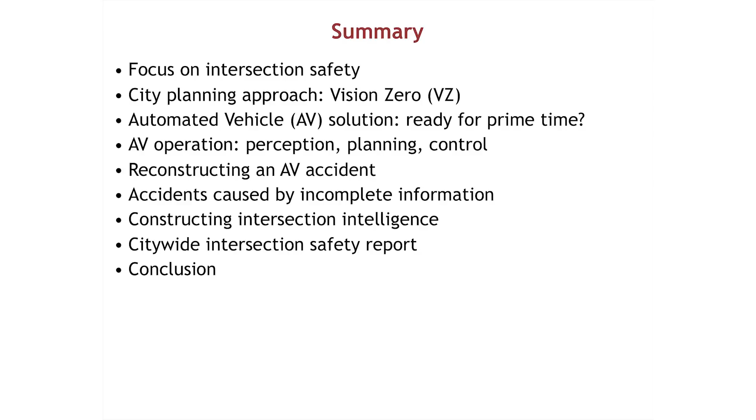This is a quick summary of what I'm going to discuss. First, why intersections and why not freeways? Second, there are two approaches to enhance intersection safety. One I call the city planning approach, which goes under the name Vision Zero. And then the second, the more technocratic approach, which is automated vehicles that are going to solve all our problems. I'll focus then on automated vehicles, go through an anatomy of a particular accident and see why it's going to be difficult to have safety, principally in intersections, so I'll discuss how to construct intelligence in the intersection. And then work to be done, or future work, which is how to make intersections in a city safe.

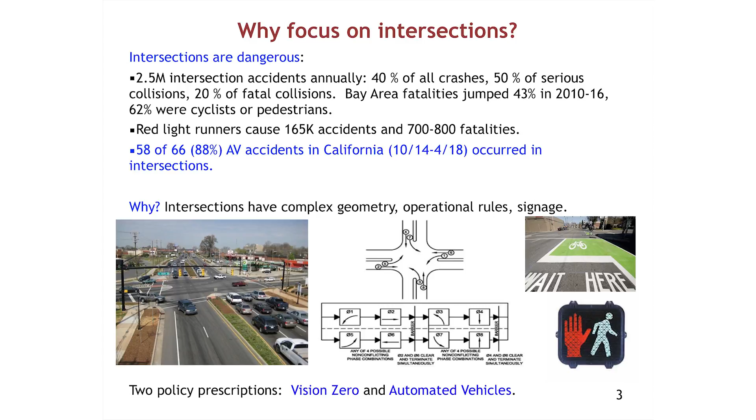So why intersections? For the usual reasons that intersections are dangerous. Lots of accidents and fatalities occur at intersections, even though they occupy a small amount of area. Some numbers over there. Red light running is another big cause of fatalities, with 165,000 accidents a year due to red light running. And the last bullet there is about automated vehicles. Automated vehicles being tested in California, if they get into an accident, have to report to the Department of Motor Vehicles how and what happened. 88% of their accidents occurred in intersections.

So why intersections are difficult is because they have complex geometry. The operational rules are difficult. You can see some of the timing diagrams or the traffic diagrams in an intersection. The signage is complicated, right? So if you're doing automatic recognition, that makes it difficult.

And so as I said, there are two policy prescriptions. One is Vision Zero, stemming from the planning community, and then automated vehicles. Let me first focus on Vision Zero. What is that all about? Vision Zero as a phrase started in Scandinavia, but then it's got imported into the US. So many, many cities like these in California already have Vision Zero plans. Basically they want to eliminate fatalities and serious accidents through infrastructure modifications. And what are those modifications?

The first one is what they call road diet. Road diet means you eliminate a lane. So instead of having 3 lanes, you'll have 2. Instead of having 2, you'll have 1 lane. And enforcement of speed reduction, so instead of 40, you go to 30, to 15, and so on.

Second one is a sidewalk extension. I don't know whether you have them here, but we have them in Berkeley a lot. Sort of extending the sidewalk so that the distance that a pedestrian has to walk between sidewalks is reduced. They call it a bulb out. And the third is protected bicycle lanes, right? More and more bicycles, and to buffer the cyclists from moving cars.

But doing all of these then funnels traffic into the intersection, so that intersection becomes a focus or locus of accidents. And now they're proposing more expensive modifications of intersections going under the name protected intersection. We have one of them in Berkeley.

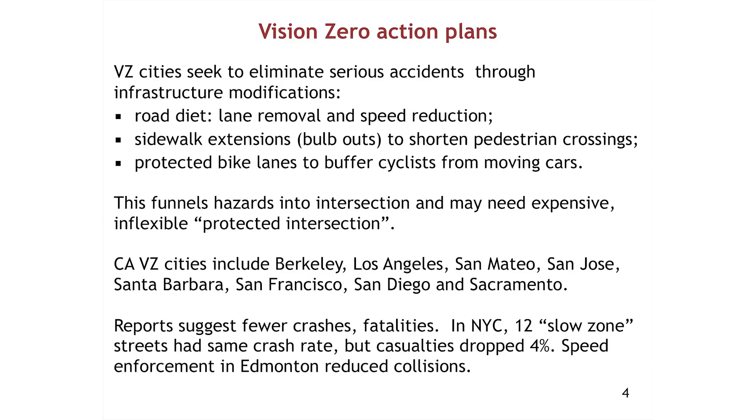Vision Zero is maybe half a dozen years old, and there's some data coming out of that. The data suggests that it leads to fewer crashes and fewer fatalities, but nothing dramatic. So in New York City, for instance, there are 12 slow zone streets that have been given the diet treatment. At the end of 4 years, they have the same crash rate, but the casualties have dropped by 4%. Speed enforcement is the main driving force.

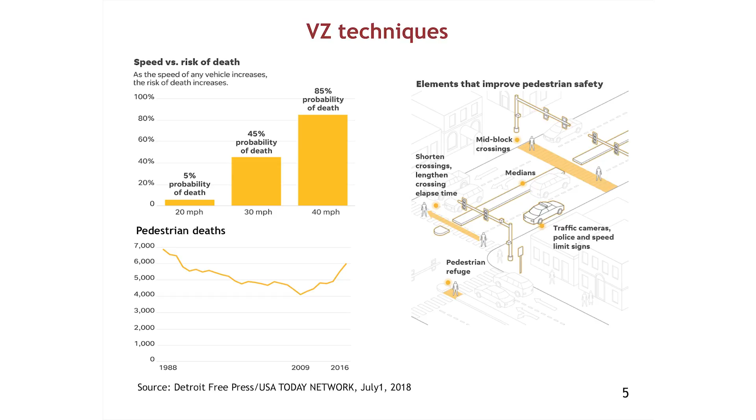Why is that? These are Vision Zero techniques. So the top diagram tells you that if you get hit by a car at 40 miles per hour, chances of survival is 15%. And the survival increases dramatically as you reduce the speed, right? So at 20 miles per hour, the probability of death is 5%. So one way to reduce fatalities is just to reduce and enforce speed reduction. But we can see pedestrian deaths have been climbing over the last several years, pedestrian deaths in the country have been climbing, and they are going up.

On the right there are some of the modifications you can do: bulb outs, mid-block crossings, shorten the crosswalk, refuge islands for pedestrians, traffic cameras, police, and speed limits. These are some of the modifications that people do.

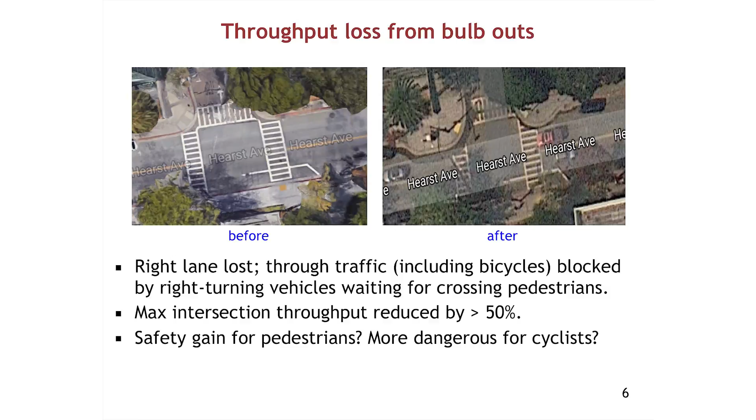I'll give you an example about throughput loss with bulb outs. This is a picture right in front of Cory Hall in Berkeley. This is the way the street used to be, with 2 lanes. Then they extended this sidewalk and that sidewalk, so it bulbed out, and 1 lane disappeared. The cross lanes are reduced by maybe 6 feet.

The result is that the right lane is gone, so through traffic and right turn traffic merge into the same single lane, and that creates problems. You get bottlenecks created. There's a vehicle which wants to turn right, but there are pedestrians crossing, so the vehicle is stuck, and everybody behind is also stuck. So there's significant throughput loss.

Is there a safety gain for pedestrians? It's not so clear, because the pedestrians come into the way of bicycles, so that part is not so clear. But anyway, that is the idea. Berkeley is full of these bulb outs now.

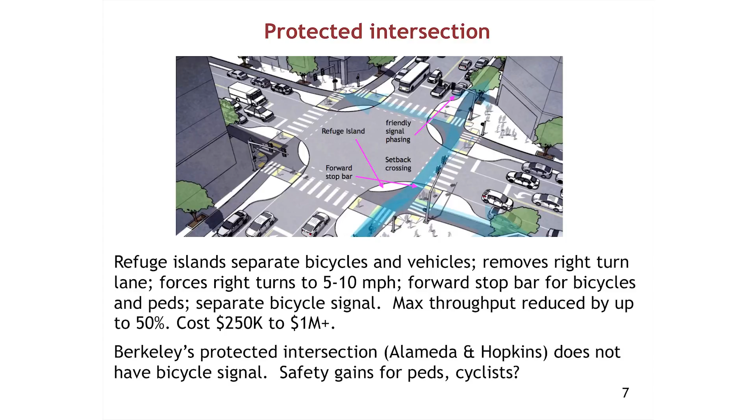So these people can now cross over here. There are these refuge islands, so people can move over here and then wait here to cross again. That's one thing. The other thing is to have friendly signal phasing, a special phasing for bicycles and not just for cars.

Again, max throughput is reduced by maybe up to 50%. The cost of these intersections is between 250,000 and 1 million plus, so it's expensive. It's inflexible, because you cannot rechange the concrete if the traffic pattern changes.

Berkeley's protected intersection doesn't have a bicycle signal. That's another thing that happens, some people go halfway, because a bicycle signal would require a lot more wiring and a lot more cost. So we forget about that, but we do the rest of the things.

So that's all I'm going to say about Vision Zero, except to note that it is inflexible, and doesn't recognize any concession to intelligence. It's simply more concrete that restricts movement, primarily restricting right turns, so that vehicles have to slow down to 5 miles an hour or 10 miles an hour because the right turn is now much sharper in order to make the turn.

The second thing is to reduce the amount of space that the pedestrian needs in order to cross the street. If the street is not very big, it's okay, but if the street is big, like in Phoenix, Arizona, then that's not even feasible because the amount you can reduce is not much.

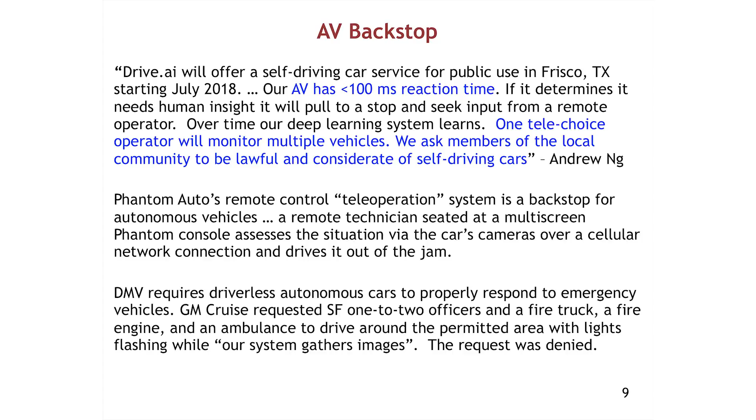They say our AVs have less than 100 millisecond reaction time—and I'll come to that question mark—but that's short. Human reaction times vary between 100 milliseconds and 1 point something seconds. Then what they do, as a backstop, is if your automated vehicle fails, there's a telechoice operator monitoring multiple vehicles, sitting somewhere, like those drone operators.

They're monitoring these vehicles and will take over control in case the control fails. If you believe that, you can believe a lot of other things. There's Phantom Auto, another startup providing that kind of service, where an operator sits in front of multiple cameras and tries to drive or steer the vehicles.

Now this is one example. The Department of Motor Vehicles requires a new rule: if your autonomous car is not going to have a driver, currently most vehicles have a test driver to properly respond to emergency vehicles. So GM Cruise, which operates in San Francisco, requested the city provide 1 to 2 officers, a fire truck, a fire engine, and an ambulance to drive around so GM can learn how these emergency vehicles operate and decide where they should drive. The city said no. So this is the kind of thing you have to deal with.

If you have an accident, you have to report it to the DMV, and also report how many miles of automated driving you've done. You divide the number of accidents by the miles, and you see the automated vehicle rate is 40,000 miles of autonomous driving between accidents. Compare that to the US human driving rate: 500,000 miles per accident reported to the police - not trivial accidents, but whenever there's some damage, you report to the police, and the rate between accidents is 500,000 miles.

So you compare the two, human driving versus automated driving.

There's something else which automated vehicle companies report, which is self-reported disengagement. This is the DMV's definition: disengagement occurs when a failure of the autonomous technology is detected, either the safety driver detects the failure, the system automatically detects it, or the safe operation requires that the test driver take over. It's the test driver's decision that the situation is not safe, so they take over.

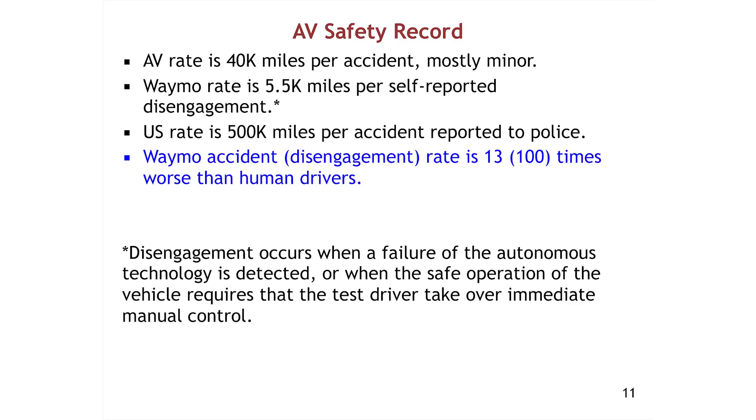How frequently does disengagement occur? That happens every 5,500 miles. If you think of a disengagement as a near, quasi, pseudo dangerous situation, then that happens much more frequently than human driving incidents. So it's not very good.

When you have a disengagement, you have to report what it was. Here's one sheet from Waymo between April and May of 2017 about their disengagements. These are failure detections.

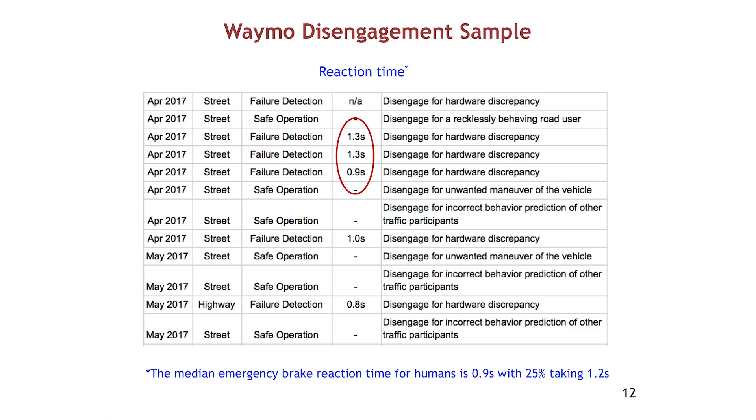How long does it take to detect a failure before the safety driver hits the brakes? 0.9 to 1.3 seconds. For humans, the median is 0.9 seconds and 25% take 1.2 seconds. So the reaction time, even though it's not the 100 milliseconds that Andrew Ng reported for Drive.ai, is actually much more — 10 times more. That's a big reaction time. In 1 second, depending on your speed, you may travel anywhere between 20 and 40 meters. So automation is not necessarily immediate, which is the implication you normally get — that it'll be so much faster than humans.

Yes, it is true that there's a tail of human reaction time which goes into several seconds if you're very old or drunk or something like that, so it's not that. Whereas there's a big tail even for automated vehicles, if you look.

How do they work? There are three things involved: sense, plan, and control.

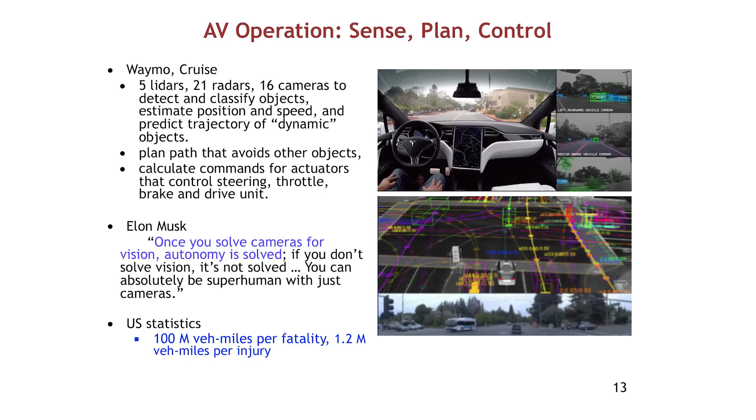I want to go to Mobileye because they guarantee safety — let's see how their guarantees amount to. They call it responsibility sensitive safety, which is incorporated in Intel's design, adheres to safety assurance, and is scalable to millions of cars.

So it's a formal model of safety. I'll just give you one example of the formal model. Suppose two vehicles on a single lane. Then they calculate something called the minimum safe distance.

V sub r is the speed of the rear vehicle. Rho is the reaction time. V sub f is the speed of the front vehicle. There's a maximum braking acceleration and minimum braking acceleration, etc. So it's got this number.

So I plug in some numbers. First example, I assume both vehicles are stopped, just parked one behind the other at the stop sign, so the vehicle speeds are 0. If I assume rho equal to 2, which is 2 seconds, that's a bit much, okay? And you put in those numbers, you get that the minimum distance is 93 meters. So if you're parking, one car parked, stopped, the other car has to be 300 feet away. That's the safe distance according to this.

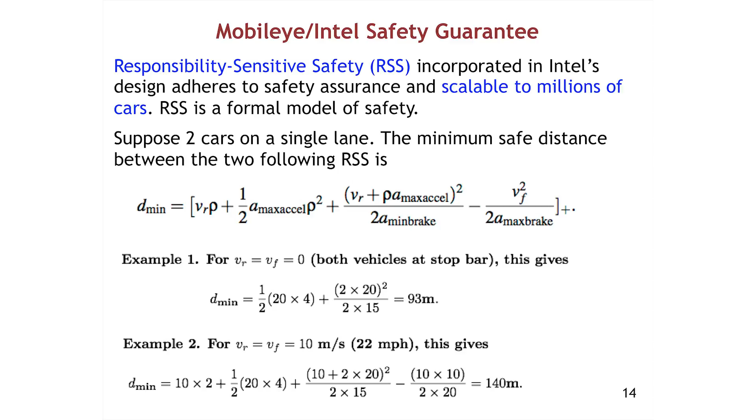If you say rho equal to 1 second, which is reasonable, then you divide this number by 4, so that's 25 meters, 75 feet. I haven't seen anybody who is parked behind the stop bar who is 75 feet between vehicles. If I make it 10 meters per second, which is 22 miles per hour, this number goes up to 140 meters. Nobody ever drives this way, right? So this may be fail-safe driving, but nobody can drive like that.

So that's the Mobileye story. I'm going to focus on one crash for drawing some lessons. This is an Uber crash, in Tempe, Arizona, on this particular date, March 24th of last year.

This is the diagram you get from the police report. There's two vehicles relevant for us, vehicle 1 and vehicle 2. Vehicle 1 is somebody driving a Honda CR-V, coming from here and making a left turn. She happens to be a woman, so it's a permissive left—she doesn't have a left arrow, but it's a green. The other one is vehicle 2, which is the Uber driving on the rightmost lane and going through. So that's the setting.

The Uber is going at 38 miles per hour through the intersection. It's a 40 mile per hour zone, so 38 is permitted—whether it's wise or not is a different story. The Uber is driving straight. There are two other lanes, but vehicles there are stopped because they're stopped on the other side, so they cannot drive. It's what's called spillback in traffic terms. So there's a spillback of traffic, but miraculously not on this lane.

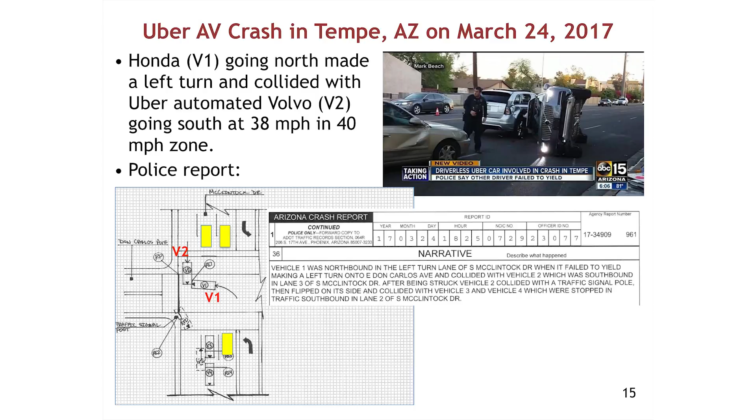So the Uber comes, and when it gets there, the light turns yellow. But the driver says the Uber is programmed to go through yellow as if it's green. So it goes through at 38 miles per hour. It doesn't matter—at 38 miles per hour you're not going to be able to stop in 2 feet anyway, so that's irrelevant.

This lady says that she didn't see anybody—these two lanes were stopped, so that was a problem. She also saw in the countdown timer of the crosswalk that she had 5 or 7 seconds left, and she didn't see any vehicle. So she went. The result was a crash, because this is going at 38 miles per hour, and the crash led to this crash. That's the police diagram.

The Uber then hit this pole on the intersection, flipped on its side, and hit 2 other vehicles. Those are the 2 vehicles that you see. So that was that crash.

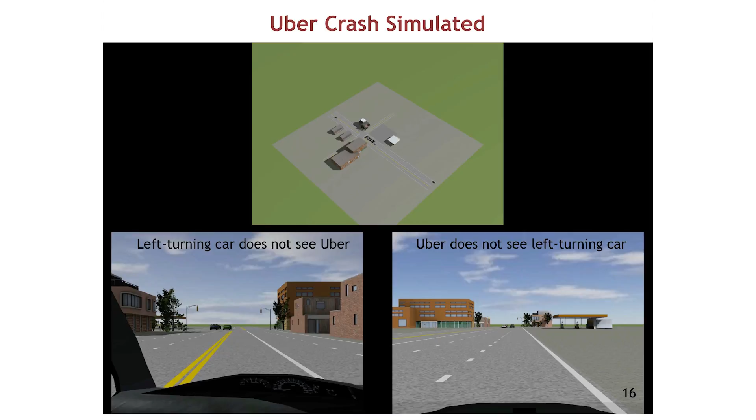This is a simulation of the crash, just so you can imagine what it's going to look like. This is the crash from the left turning vehicle—it stopped, makes a left turn, didn't see any vehicles. This one will maybe illustrate better the top view.

This Uber is coming fast. She's coming, stops, makes a left. This one cannot see that.

So what are the lessons from this? I think there are so many lessons. First, Uber did not predict that the light would turn yellow when it entered the intersection—couldn't, we don't predict when the light is going to change. It did not know that the traffic in the opposing direction could make a left turn—there was a permissive left. Doesn't have to be; it depends on the signal pattern.

The safety operator saw the Honda too late, he says, as the traffic in the first two lanes created a blind spot—those two cars were parked, so he couldn't see that. The Honda driver says, I was about to cross the third lane and then saw a car flying through the intersection but couldn't brake sufficiently fast to avoid that.

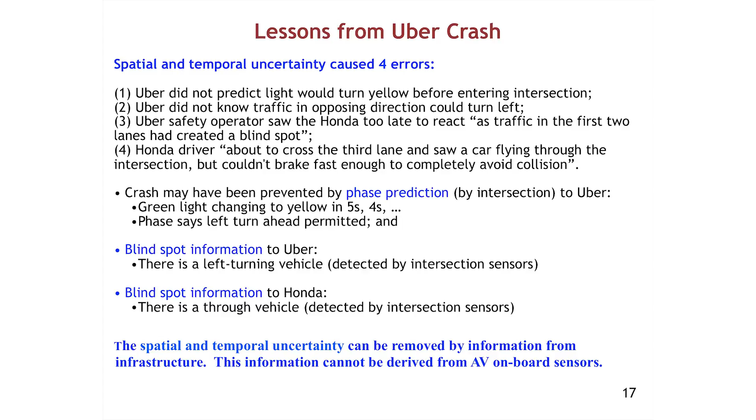So how could that crash have been prevented? Well, there are several things that could have happened. The intersection could have provided a phase prediction that the phase is going to change in the next 4 seconds, 3 seconds, 2 seconds, etc. So you have some advance warning, slow down, right? You could have even programmed your vehicle to slow down in that case. It could have said that the phase permits the vehicles to turn left.

So then you could be warned that such a warning could occur. Blind spot information, the intersection, if it detects this left turning vehicle, could have said to the Uber that there is a blind spot you have and there is a vehicle turning and occupying that blind spot. Similarly, it could have given that information to the driver. So if any of these things had occurred, or all of these things had occurred, and they would have been taken into account by the two drivers, or the automated vehicle and the driver, then that accident could have been prevented.

So there's spatial uncertainty because you don't know what the phase looks like to the other approaches. There's temporal uncertainty because you don't know when the phase will change. So if those two are provided, then you can do that. Lastly, no matter how many sensors you put on the vehicle, you will not get this information. You don't know when the light will change, and you don't know if there's somebody in your blind spot.

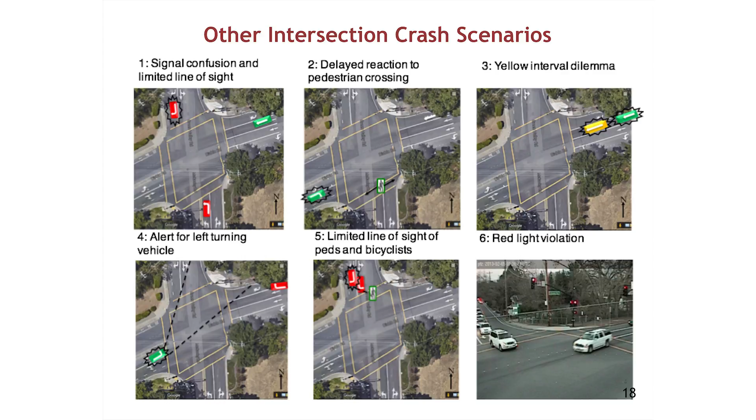These are similar other accidents. This is a red light violation. So this vehicle has entered the intersection 7 seconds into the red. Fortunately, this vehicle sees it and slows down and swerves, so it avoids that particular accident.

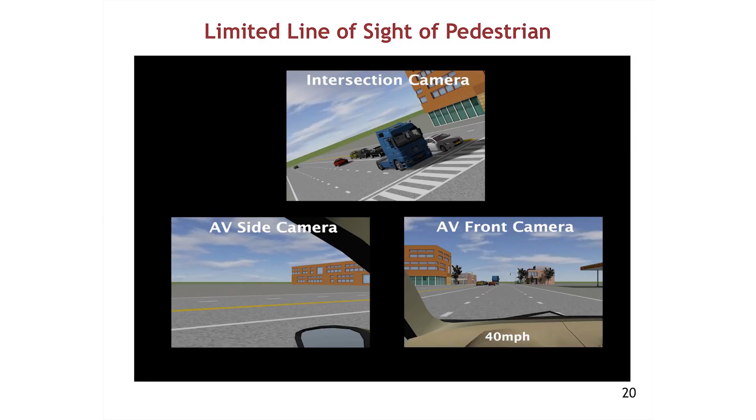This is the yellow interval dilemma, right? So there's a crash. There's a pedestrian coming and the vehicle doesn't see it because that's a common situation. In Berkeley especially, you have to be very careful because pedestrians are usually looking at their iPhones when they cross, right?

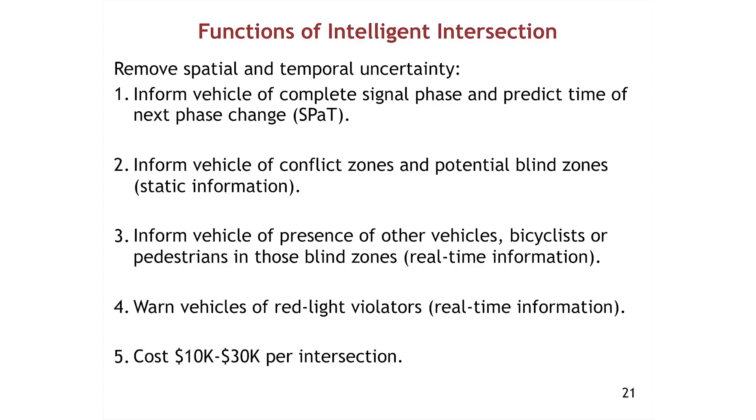So you want to give some real-time information, which says these blind zones are occupied, right? That requires some sensing. Lastly, you should warn vehicles of a red light violator. As I said in that particular example, that violator was 7 seconds into the red, so he would have been seen 2-3 seconds in advance before he enters the intersection. And you could have taken some action.

You could warn the vehicle. Alternatively, depending on the timing, you could have extended the green light for that violator, so the violator could go through, and put red on the other ones. But there's a moral hazard here, obviously, because you encourage that behavior. So you have to combine that with a stiff fine to overcome the moral hazard.

So that's a possibility. Let me explain a little bit about signal phase and timing, about how the signal phase and timing change. So this is a particular intersection in Montgomery County. It's got 8 phases.

For people who don't know transportation, traffic lights have phases. P4 and P8 are these phases, sort of the minor direction. When that's green, this is the timing diagram, so phase P4 and P8 will last this much. This is one cycle up to here, then P1 and P5 come on, and then the blue phase.

P4 and P8 are this cross direction. P1 and P5 are the left turns. P2 and P6 are the major thoroughfares.

Now this is an actuated signal, meaning the phase duration is not fixed — it depends on the sensed traffic. Here's 2,000 cycles, and if we take one particular cycle, the green phase, which is P4, P8, can extend. There's a minimum amount of 32 or something, which is for pedestrian crossing, and then an extra amount depending on whether people push buttons or whatever.

So that's the green, then comes the red phase, which is the turns — sometimes that's not there if nobody's making a left turn, and sometimes it's quite a bit. The remaining time in the cycle is given to the through phase. So that's what it is.

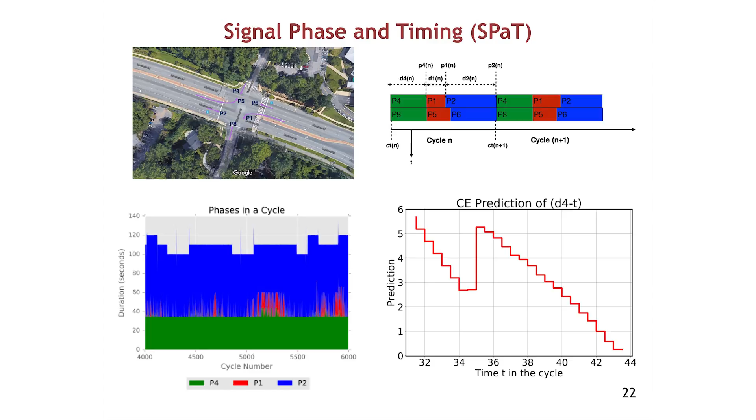This is also used a lot for eco-driving. So you want to go through this intersection and you're waiting for the green light — it'll tell you when the green light is likely to start. This information is used to control your vehicle's speed profile and engine so that you reduce the amount of fuel you consume.

Now I'll go to blind zones and conflict zones. Just to give you an idea, these are all the possible movements you have: there's a through movement, a right turn movement, and a left turn movement.

Let's look at a right turn movement. There's a trajectory a vehicle would follow making a right turn — lots of trajectories making a right turn. You group them all together, and I call that a guideway. So the guideway is a bundle of trajectories making the same turn, and that's the blue one, which is making the right turn.

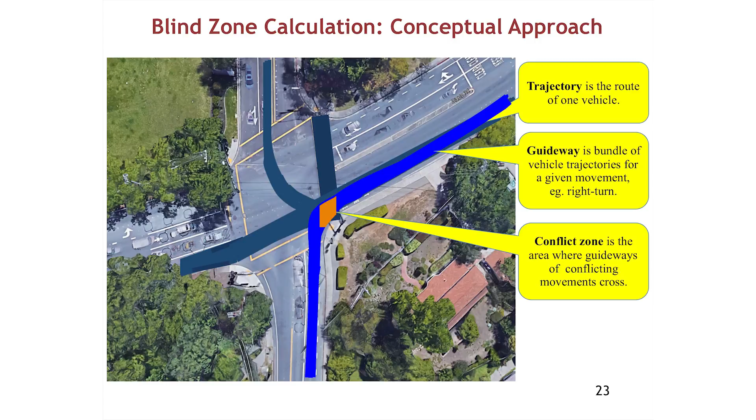There are many other guideways. Here's the guideway of pedestrians crossing the street, here's the guideway of a left turn from the north, here's the guideway from west to east. So there are lots of guideways. Wherever two guideways intersect, that means these are two movements which can coincide — that's a conflict zone.

So that's all this thing is about. Now let's look at this particular movement — this one is making a right turn, that's the white trajectory, and the magenta thing is the guideway for that right turn movement.

How many conflicts does this vehicle have with that right turn? There are 7 conflicting movements. What are they? The white ones — left turn from the north, a through movement from the west — these are conflicts with vehicle trajectories. The black one — left turn, through, and a right turn — these are 3 bicycle movements with which you may have a conflict. Finally, you have 2 yellow ones, which are the 2 pedestrian movements. So there are 7 conflicts.

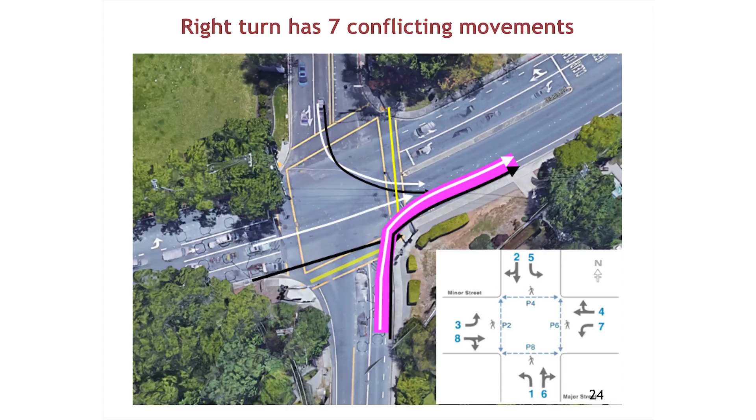So while you're negotiating this right turn, you have to somehow take care of these 7 conflicts. What do you have?

You know the phase that you're in—that's one piece of information. Second, you can see some things—that's the second piece of information. So that's all the information you currently have. Now let's see what happens. Let's first go to the phase information.

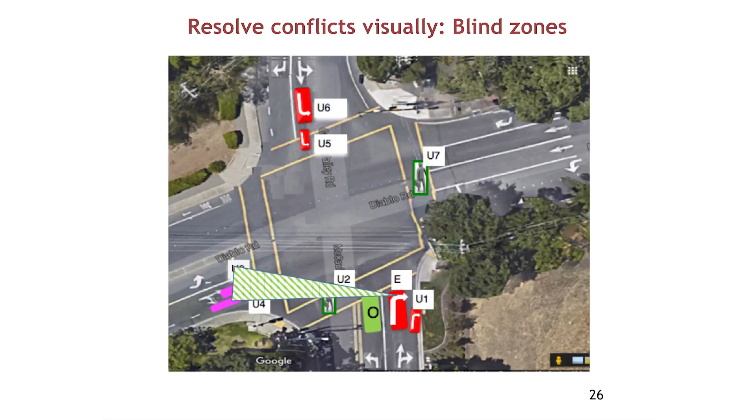So let's see what happens. Several conflicts you can resolve visually. So as you make this turn, you can see these two trying to make a left turn, and you can see whether they are making a left turn or not. I assume that if you can see them, you don't worry about it, right? Similarly, this pedestrian is visible from you, so we don't worry about that either. So those 3 conflicts are gone.

But next to you is this parked vehicle, so there's a cone of obstruction. You cannot see this vehicle, you cannot see that vehicle, you cannot see this, and also this pedestrian you cannot see. So there are still conflicts remaining because there are agents in your blind zone. The only way you should go is if you can decide that these 3 objects are not present, which is not what we do, right?

And we sort of go anyway and hope for the best. Also, we may be more alert than normal if we're making this particular right turn, and make sure that we're crawling, and as we crawl, we see more and more. That's another approach. But if you're an Uber vehicle, you may not be programmed to do all that.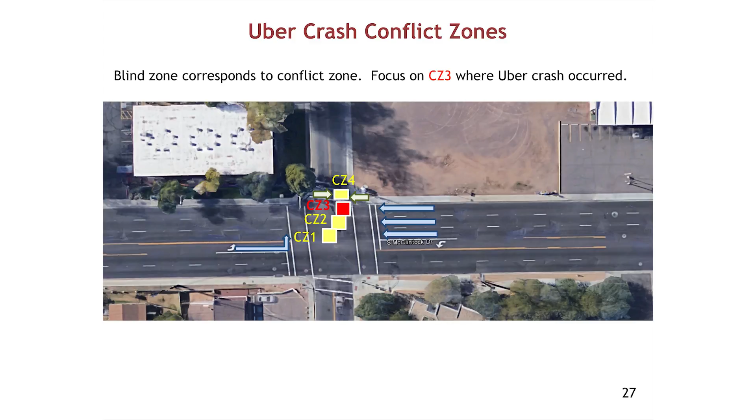We don't worry about CZ1 and CZ2 because she can tell that these guys are not moving, so nobody is going to show up there. For this one, she thinks there's nobody there because she doesn't see anybody, but there is a conflict. So we want to see what is the blind zone for her. Similarly, if this vehicle is moving this way and these two are blocked, there is a blind zone. So what is the blind zone calculation?

This is the blind zone calculation from this vehicle's viewpoint. Situate yourself at this point, and then you have a certain angle of view—that angle of view I've drawn as this vision zone. You can see everything in this vision zone unless it's blocked, and this part is blocked by these vehicles. So this whole thing is a blind zone. This vehicle should not move unless she is sure that there's nobody in this blind zone.

You calculate the amount of blind zone. This is the upstream traffic given a certain speed—how far you need to be able to see, or how far.

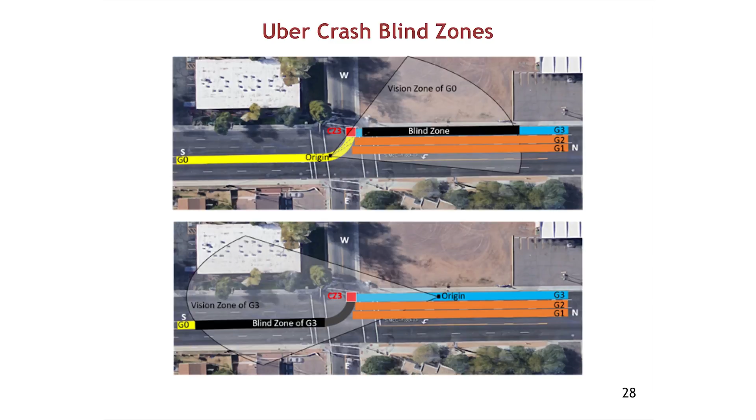Symmetrically, from the viewpoint of the Uber, if it's sitting over here, it can see that these two are blind zones—so everything here is in the blind zone. So any left-turning vehicle in here, this Uber cannot see. It needs to be warned that there is somebody there, or it has to trust.

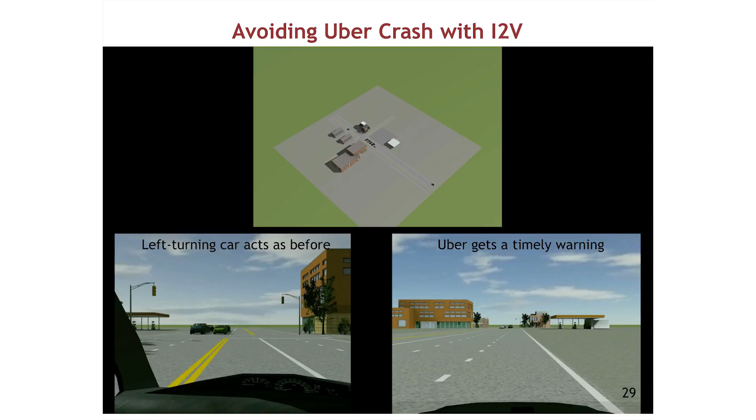So if you had these warnings, how would that picture look? This is a left-turning car, it does the same thing as before—stops. This is the Uber. It gets a conflict warning, then it's all clear, then it gets a yellow light, then it gets a red light. Stop. So that's the result.

How? Because currently, in this particular intersection, there was no red light violation camera. But the way those red light violation cameras work is somewhere upstream, it measures the speed of the approaching vehicle. It knows what the phase is and decides that this vehicle is not going to stop before the light turns red, and takes pictures and issues a ticket. So it's got about a couple of seconds before it can do that.

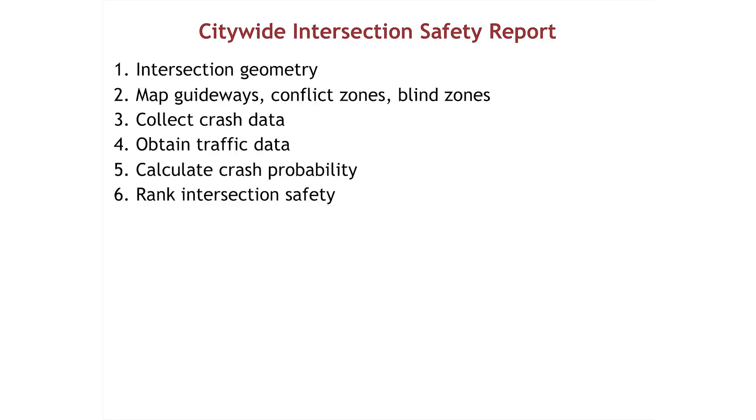Now, given that, I want to know how should I construct a citywide intersection safety report. This is all work in progress. I will take all the intersections in SF and say this intersection is more dangerous than that one, and this intersection will profit more if you provide some investment. That investment for an intelligent intersection would be between $10,000 and $30,000 in my estimate, depending on how big it is, how many sensors you need, how many possible blind zones there might be.

So the steps are: calculate the intersection geometry, then map the guideways, conflict zones, and blind zones. That's a basic notion. Collect the crash data and traffic data to figure out how to rate that intersection, and calculate the crash probabilities.

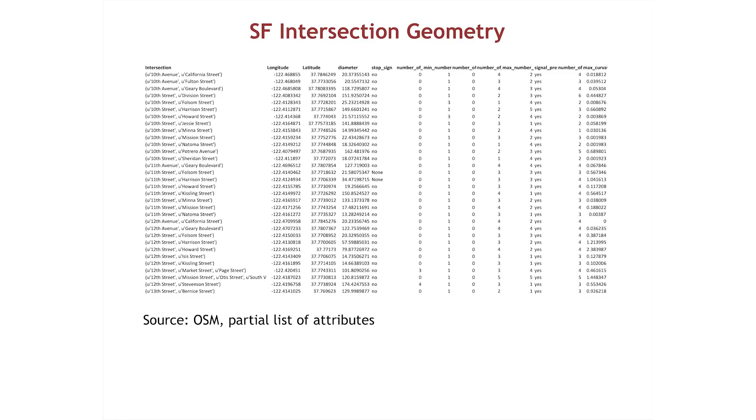So for San Francisco, we have OpenStreetMap data for all the San Francisco intersections. There's about 20 attributes, which I won't describe for you - longitude, latitude, diameter, et cetera. And these are the intersections. So that's one thing you can get from OpenStreetMaps.

It's not automatic. I mean, there are bugs in there, so you have to fix those bugs, but it's doable. So here's an idea.

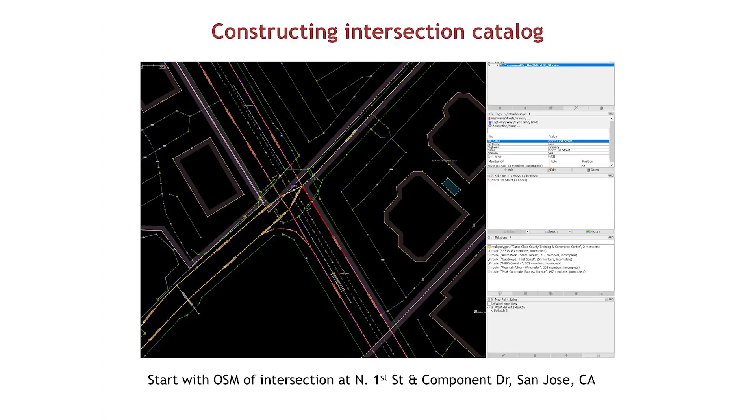Then how do you construct the intersection catalog? So this is OpenStreetMap data you get for a particular intersection in San Jose, at First Street and Component Drive. You start with that. You can identify, there's metadata available for each of these things.

So basically, the basic construct is dots, points with coordinates - latitude, longitude. And dots are connected, grouped together into what they call ways, W-A-Y. So this is a way, that's a way, and so on. That's the basic information, and it'll also give you the number of lanes, and the midpoints on the center of the lanes. So that's your basic information, that's the kind of stuff you get.

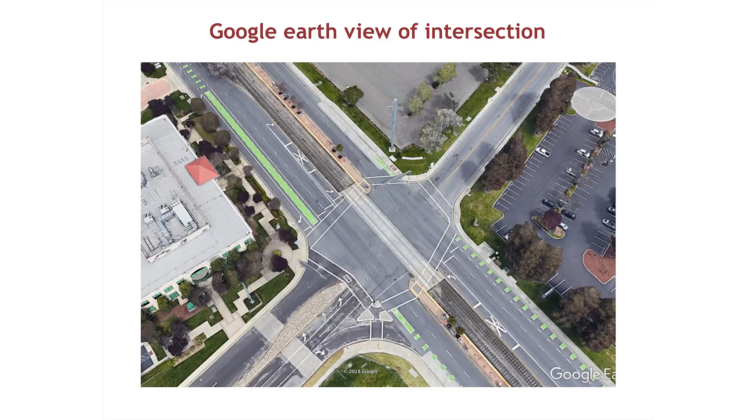For that particular intersection, this is the Google Earth view. Now you take that data and construct the guideways. We construct guideways by taking the entry lane into the intersection and the exit lane from the intersection, and connect them. So those are the guideways, the center lines of guideways.

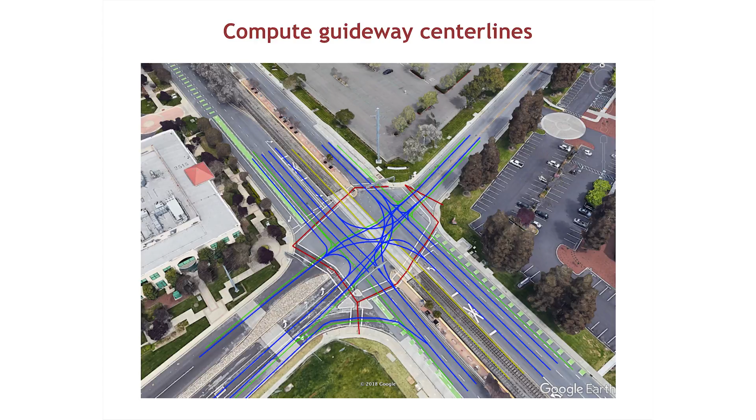They go from the center of the lane or center of the crosswalk. Now this guideway also has a rail, so there's a rail guideway, and it has bicycle lanes - those are the green. So the greens are the guideways for bicycle lanes, the centers for guideways. The blue are the vehicles, the red are the crosswalk. So that's the first thing.

The next thing now is to make a guideway. The idea is for a lane movement, it'll be lane wide. Right, so that's what you get. So those are some of the guideways.

Now we're computing a blind zone for this particular left turn. First, let me show the conflict zones - the conflict zones are where two of these guideways intersect. So here's a conflict zone between this train and this left turning vehicle.

Conflict zones with the pedestrian crossing and that vehicle. Conflict zone between two lanes of through traffic, etc. Right? So those are the conflict zones.

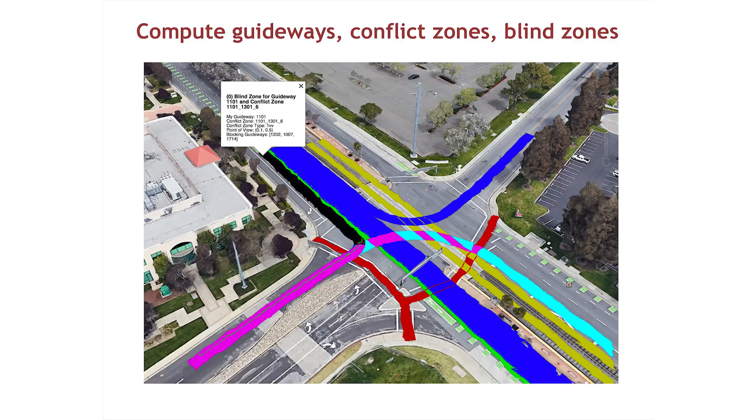Then we look at a particular conflict zone and see what is the blind zone corresponding to that. So in this particular case, it is this conflict zone together with this right turn. And you see that all of this could be a potential blind zone. Whether it is actually a blind zone or not, whether it is occupied or not, will depend upon whether there's vehicles.

So you can compute the blind zones and the conflict zones for every intersection and reasonably automate it, right? So in the case of San Francisco, there's about 1,500 signalized intersections, so there'll be 1,500 such stories.

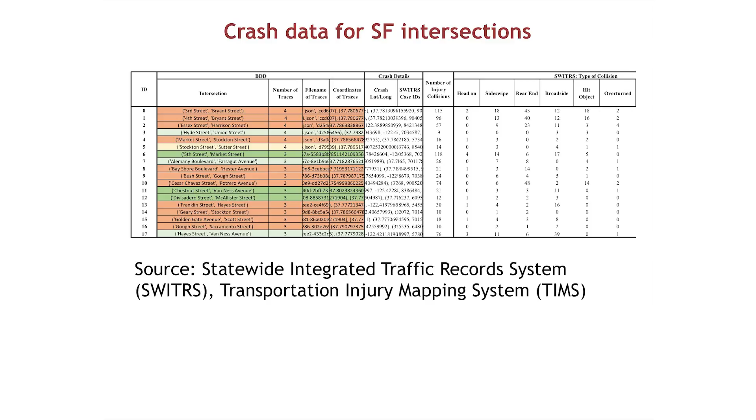So now we have the intersections. We also have for San Francisco all the crashes that took place for the previous 5 years. So this is the crash data, gives you the intersection, and so forth. Description of the intersection involves a pedestrian, not involve a pedestrian, just property damage or actual injuries, and so on. So you get all of this. This is California public data.

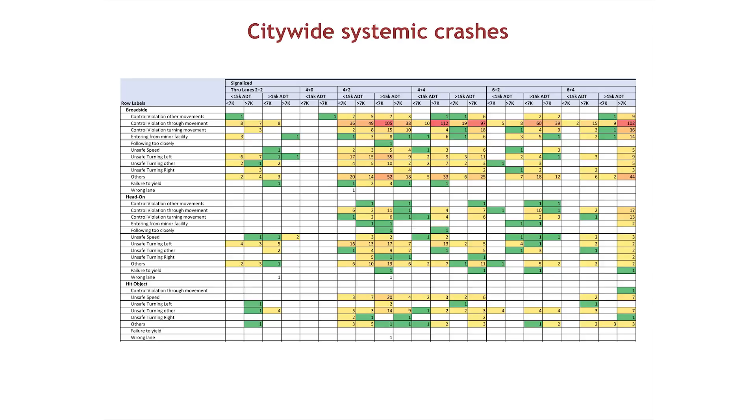This is an idea of what you do. This is for San Diego. So you have here the kind of crash which took place, head-on crash, following too closely, etc. And these are various signalized intersections. And you can see a correlation between kind of crash and kind of intersection.

So that's what we want to do for San Francisco. The last thing we want to do is to calculate a crash probability. So this is just the elementary exercise, right?

So this is a vehicle, this is the same intersection as the Uber crash, except this time this vehicle wants to make a right turn instead of going through. And I want to know what is the probability of a right turn and hitting a pedestrian.

Well, it's straightforward. So the crash will happen, we hypothesize. You want to make a right turn, and you are blocked from seeing this pedestrian because these two vehicles are sitting there. So I can calculate the probability that there's a queue, and within a particular cycle, what is the probability that there's a vehicle going to make a right turn?

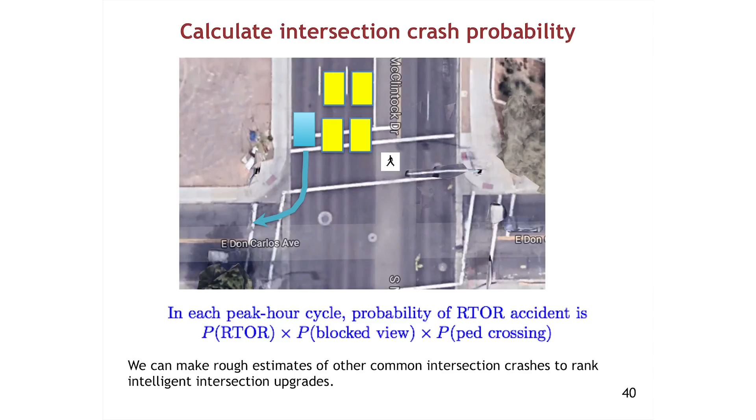And the last thing I need is the probability there's a pedestrian, that somebody's crossing the intersection. So that I can get if I know the crosswalk data, and I know the right turn data, etc. So if I do that, then in a peak hour, this probability is very, very high, right?

So probability of making a right turn on a red is almost 1. The probability that a view is blocked is going to be 1 because it's peak hours, so traffic is going to be stopped. Not all the traffic will be cleared during the green. And there's a high probability that somebody's walking.

But in fact, you don't have that many accidents, these calculations suggest. So there's something else which is going on, which is that the pedestrians are very alert. So they don't just decide that I'm going to cross the crosswalk and go blind, right? So this number needs to be understood better. When is it that a pedestrian will run into a car?

But anyway, we can make rough estimates of all the other kinds of crashes which are possible and assign probabilities to them to come and assess an intersection safety probability.

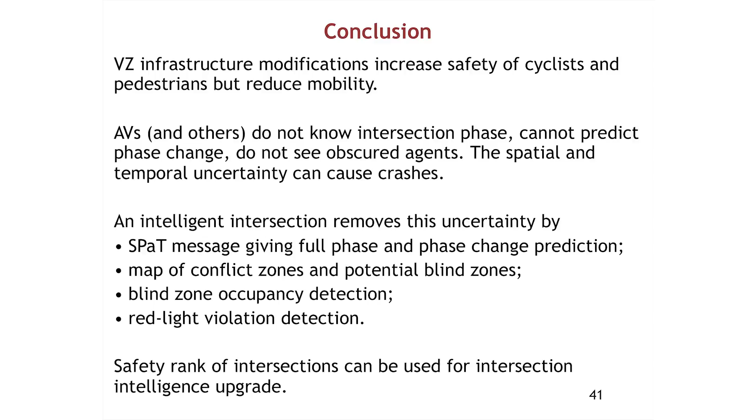So I'm going to conclude by saying that Vision Zero infrastructure modifications, A, are expensive, B, are inflexible, but C, they do provide benefits, principally by reducing speed. That's the main thing. But the inflexibility and the penalty for mobility is significant.

Automated vehicles and others, pedestrians, cyclists, drivers, they don't know the intersection phase fully. They cannot predict when the phase will change. They don't know where the blind zones are. They don't know if the blind zones are occupied. And that spatial and temporal uncertainty can be a contributor for crashes.

There are, of course, many other causes. You're drunk, so it doesn't matter, giving you any information doesn't help, right? Or you're distracted. So those are the two other major causes. And an intelligent intersection can remove this uncertainty, right, by providing these SPaT messages.

And then you could rank safety of every intersection. And if a city has a plan to improve its safety performance and has a limited budget, then this thing can tell you how to rank the intersections and proceed.